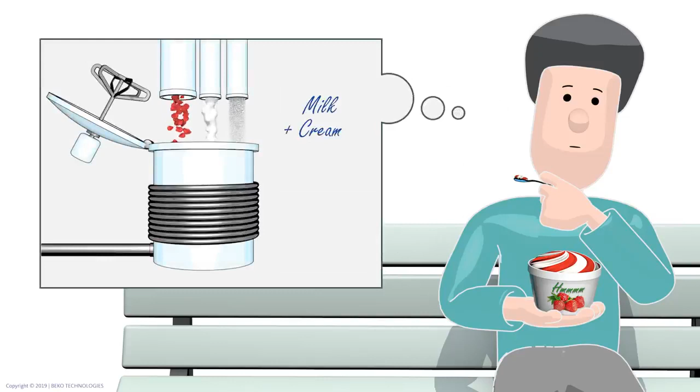That is Peter. And on this sunny day, he, like many others, has an appetite for a big ice cream. There he is already. Which ingredients are needed to produce ice cream? And how is it even made? Why compressed air? Peter asks himself. He hasn't thought about it yet.

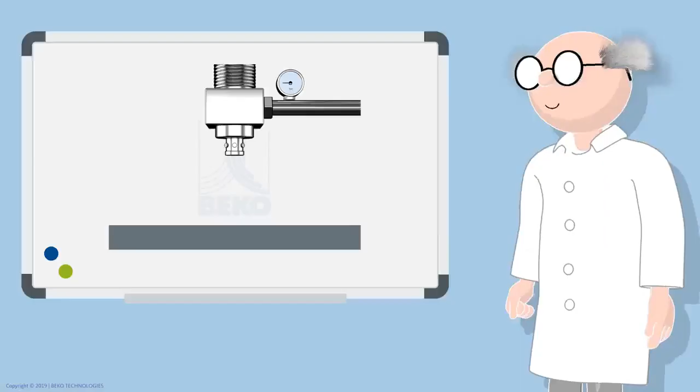Compressed air is used because the air pockets increase the volume of the ice cream and make it creamier. This is quite a great invention. But isn't normal air filthy, and contaminates the ice cream with unwanted, or even hazardous substances? No need to worry, dear Peter.

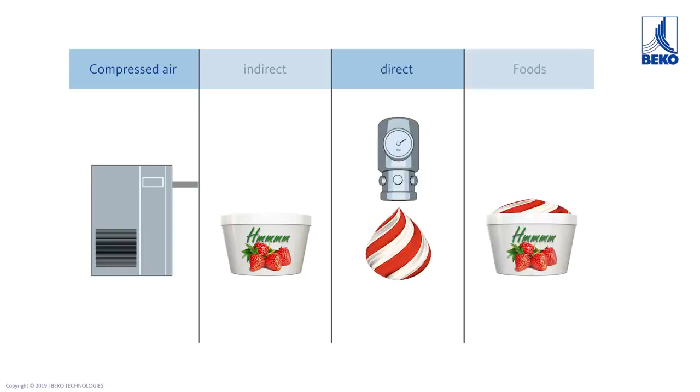Compressed air is needed in almost every production process. Compressed air comes into indirect or direct contact with the food. Anyway, a high degree of care is required for this process. In indirect contact, for example, the cleaned yogurt jar is dried with compressed air.

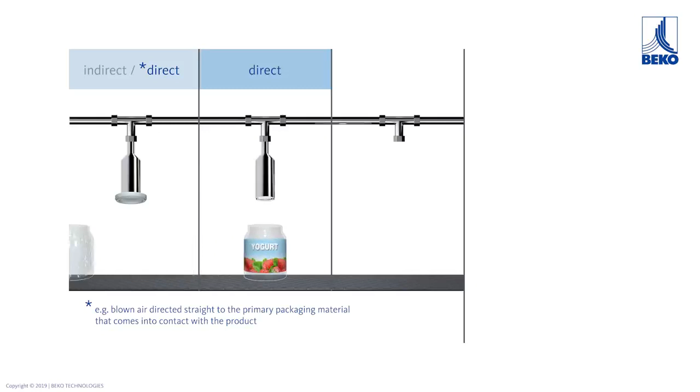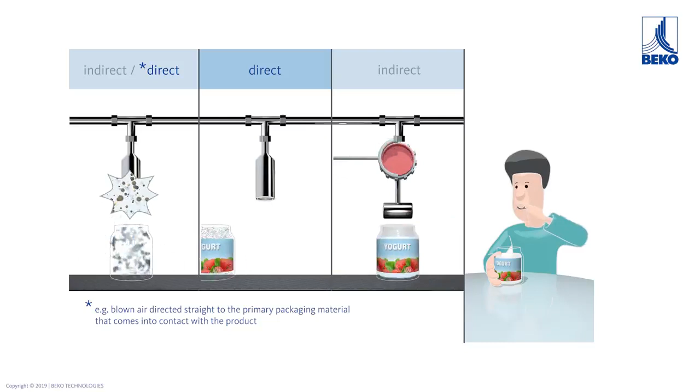Direct contact occurs when the product is filled with compressed air. Finally, the closure of the jar is transported with compressed air, and closed. Contamination by microorganisms, oils, or particles can contaminate the end product in both indirect and direct contact, and cause an enormous loss of quality.

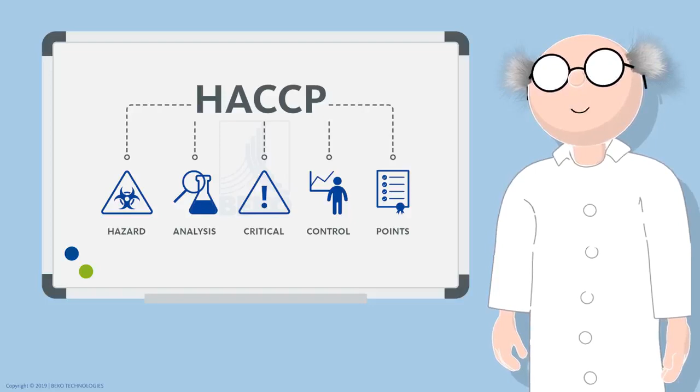There are different and effective approaches to ensure food safety. For example, the HACCP, a management system for hazard analysis and definition of critical control points, as well as additional processes to measure, control and minimize risks, like the Operational Prerequisite Program, OPRP.

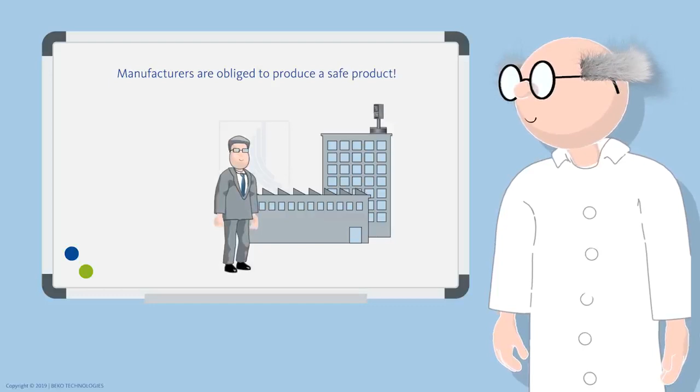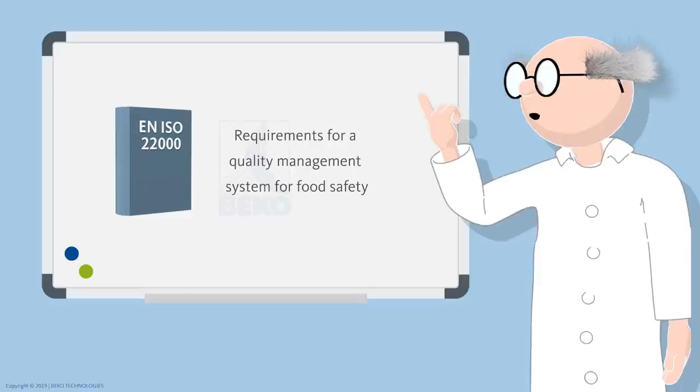Manufacturers are obliged to produce a safe product. The producers themselves are responsible for determining and monitoring their compressed air quality. This is expressly stated in the standard EN ISO 22000. The requirements for a management system for food safety are defined here. The standard applies to all organizations in the food chain, regardless of their size and complexity.

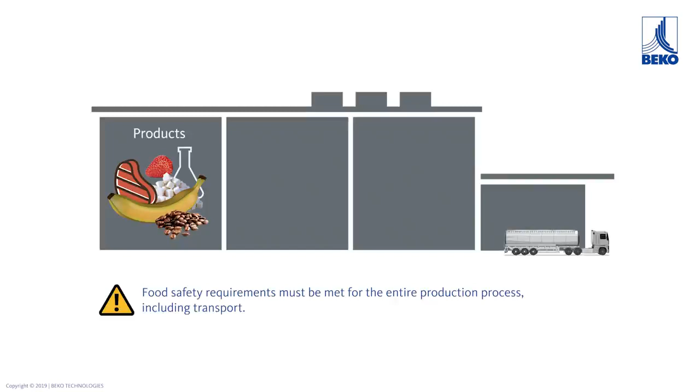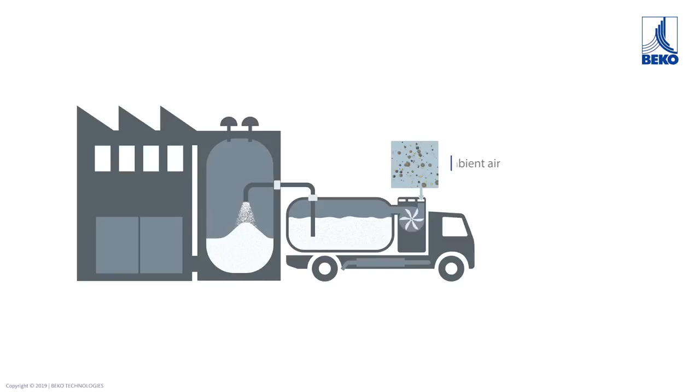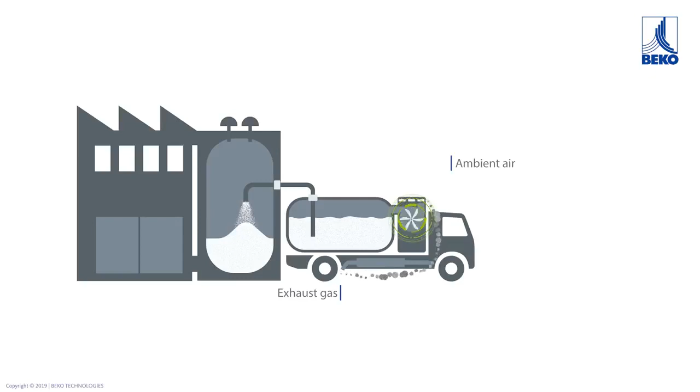The requirements for the safe manufacturing process do not only apply to our own production, but also to that of each supplier. For the entire production process, including transport, food safety requirements must be met. The example with the truck shows that even a clean product can still be contaminated in the last few meters. Via the truck's compressor, unfiltered ambient air would be sucked in and used for the unloading process. A suitable compressed air treatment system must always be used for safe loading and unloading.

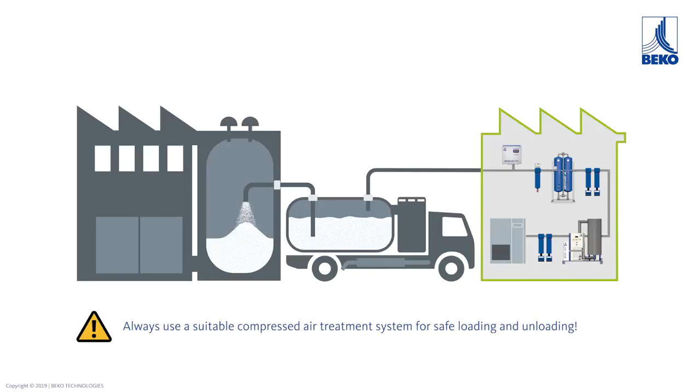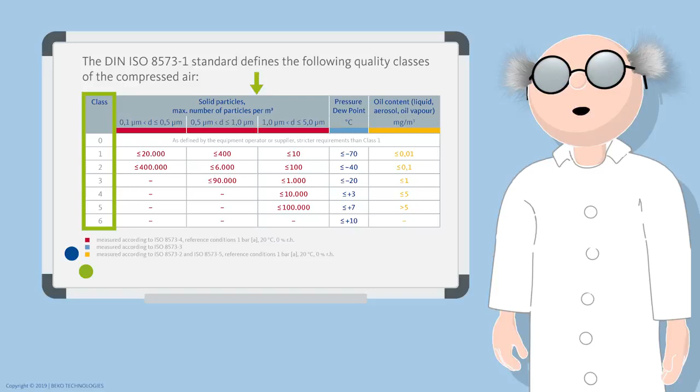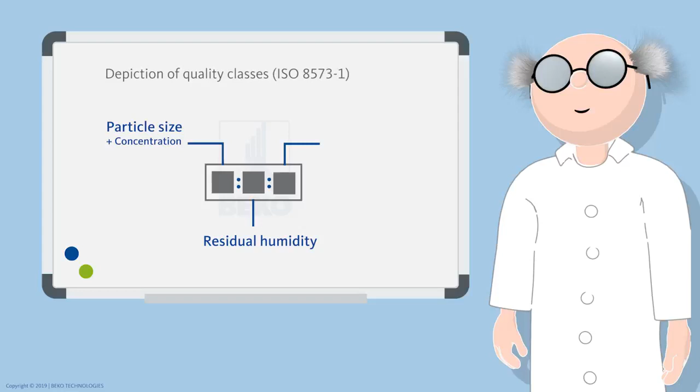The standard ISO 8573, for example, stands for the quality requirements for compressed air, and specifies the maximum content of solid particles, air humidity, and residual oil, or oil vapor, that may be contained in the respective classes. The quality classes for compressed air are indicated by 3 digits. The first digit stands for the particle size, the second for the residual humidity, and the third digit for the oil, or oil vapor content of the compressed air.

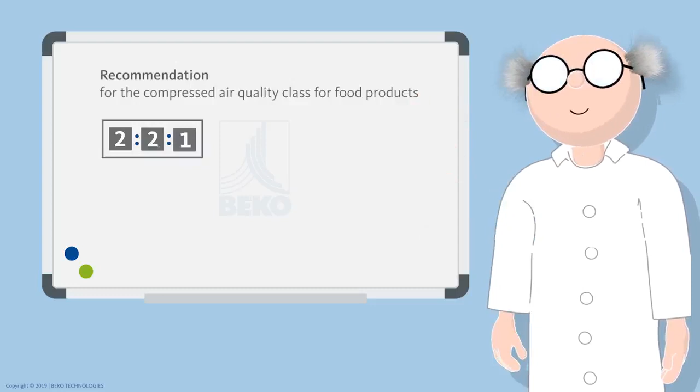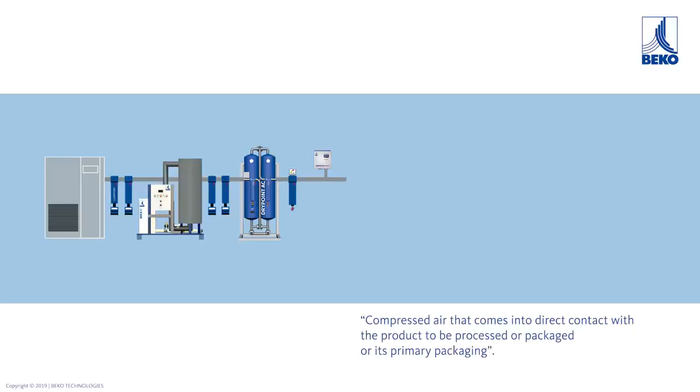Depending on the required quality class, an appropriate treatment of the compressed air is necessary. This applies to the food industry. There may be no entries into the food from sources of danger by compressed air. In case of direct contact between product and compressed air, the quality class 2:2:1 is recommended. In the case of an indirect contact, the recommendation for the compressed air quality is class 2:4:2.

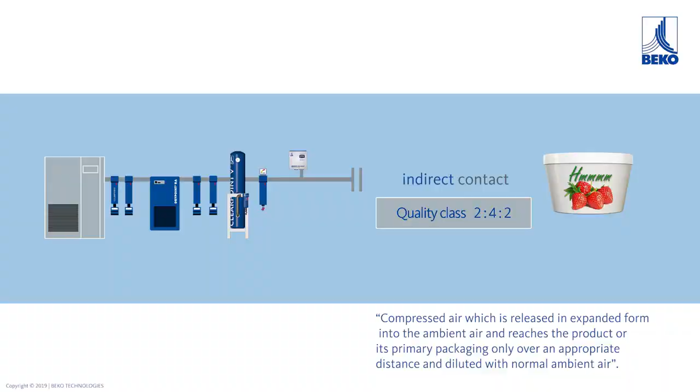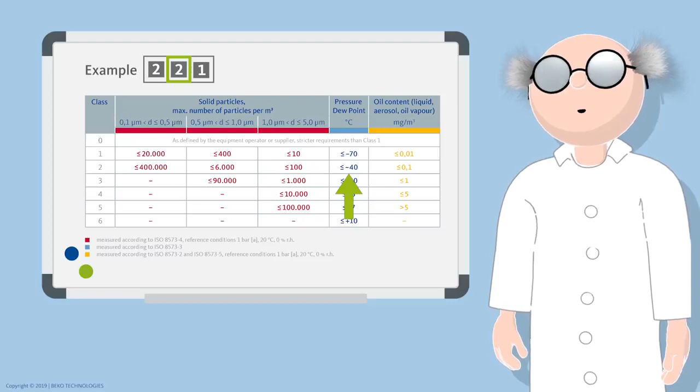As a reminder, please refer to the table again. With a compressed air quality of 2:2:1, there may be less than 100 particles, with the size of 1 to 5 micrometers, in 1 cubic meter of compressed air. The residual oil content, in this cubic meter, is limited to a maximum of 0.01 milligrams. If one now considers the middle figure for the residual moisture, a pressure dew point of -40 degrees Celsius is required. Special dryers, such as adsorption dryers, must be used for this very dry compressed air.

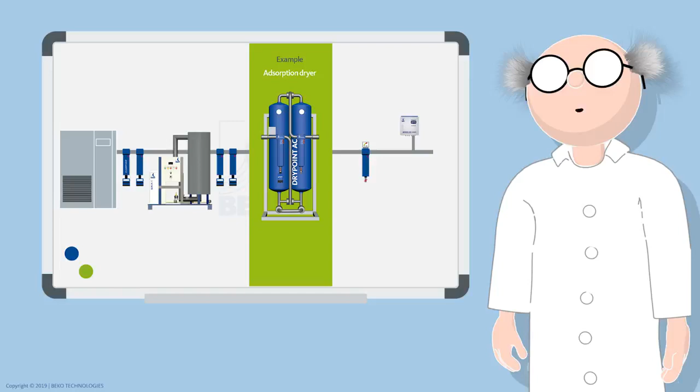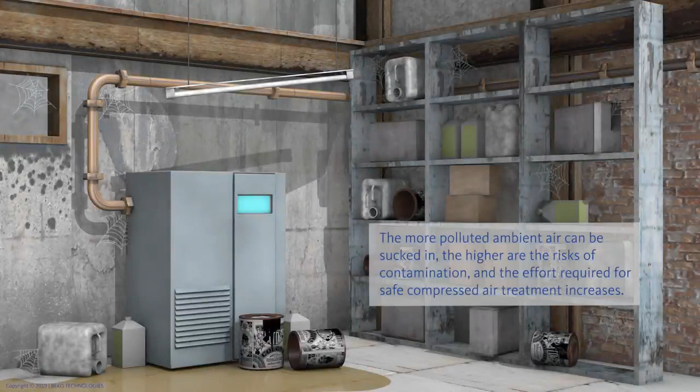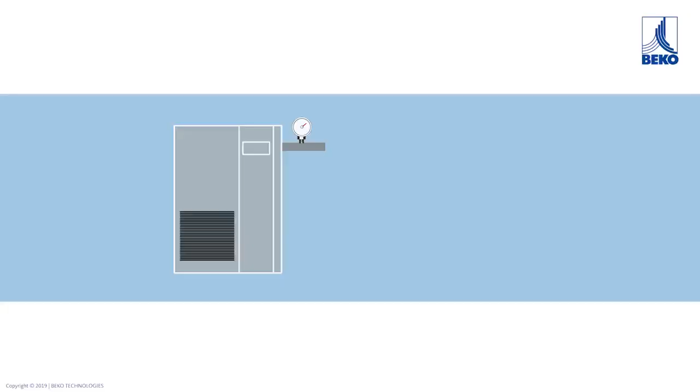The location of the compressor has a great impact on the quality of the compressed air. The more polluted ambient air can be sucked in, the higher is the risk of contamination, as well as the effort required for the safe treatment of the compressed air. It should also be noted that the ambient conditions, such as day and night, can change considerably.

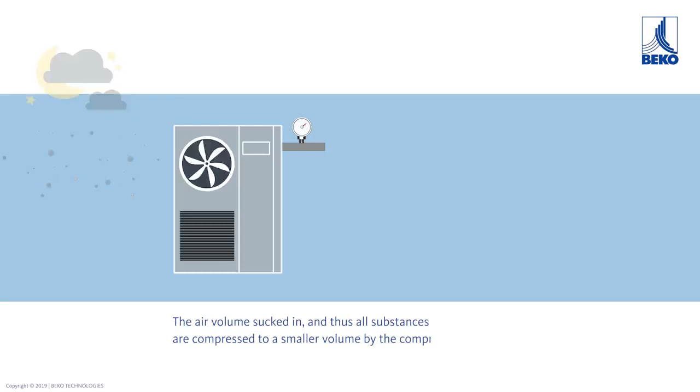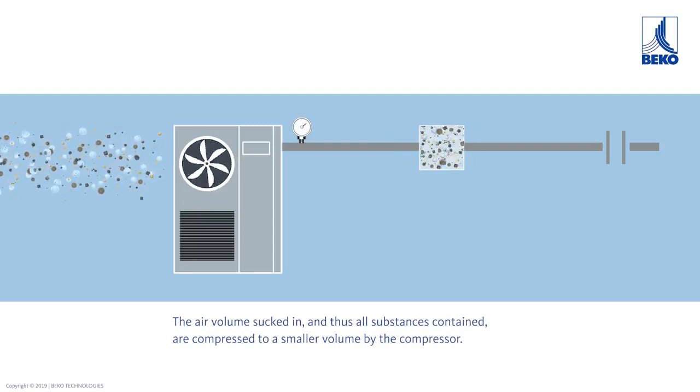The air volume sucked in, and thus all substances contained, are compressed to a smaller volume by the compressor. For example, with a compression of 10 cubic meters of ambient air, with a system pressure of 7 bar, after compression all components of the sucked-in air are contained in approximately 1.4 cubic meters of compressed air.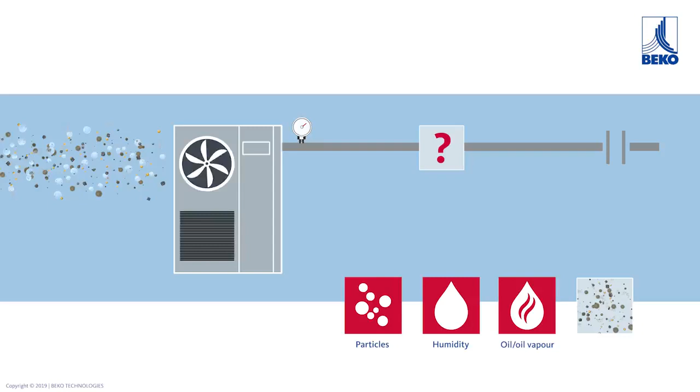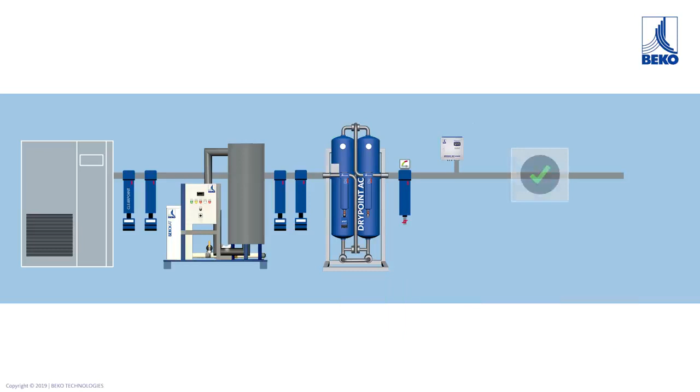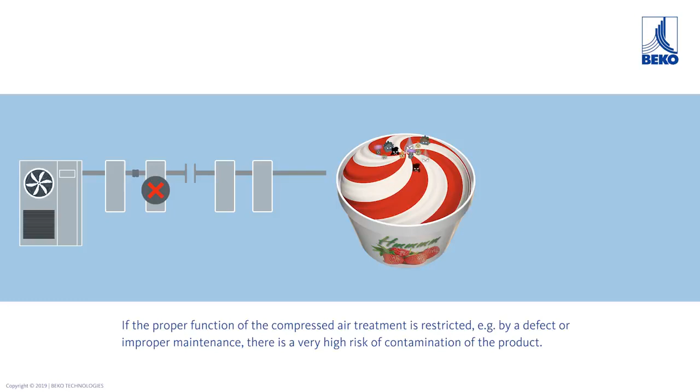It must therefore be expected that after the compressor, a mixture of particles, humidity, oil vapor, and germs is contained in the compressed air. However, these substances can be removed, or their quantity reduced to a harmless minimum value, by optimal compressed air treatment. It becomes problematic if the proper function of the compressed air preparation is restricted by a defect or improper maintenance. Here there is a very high risk of contamination of the product. The influencing variables are the time of malfunction, temperature, pressure, and humidity.

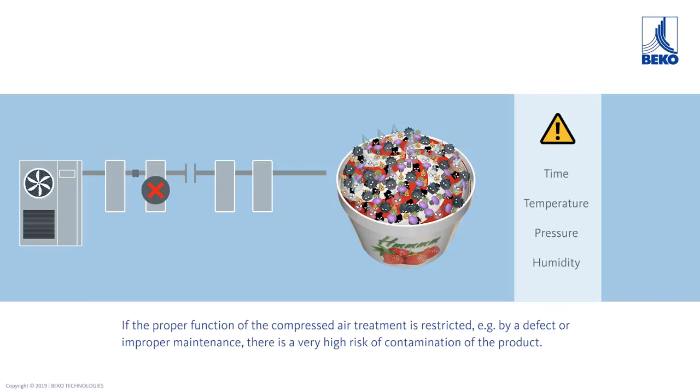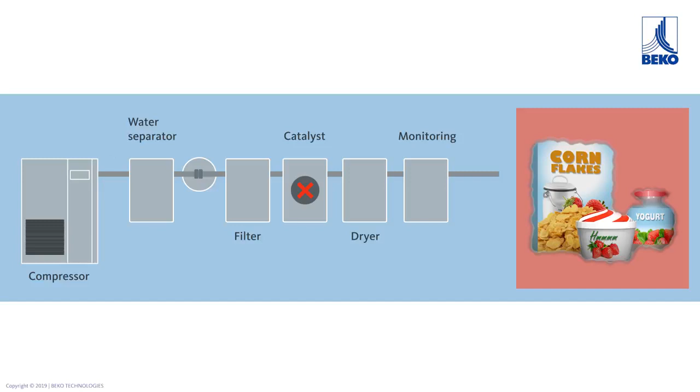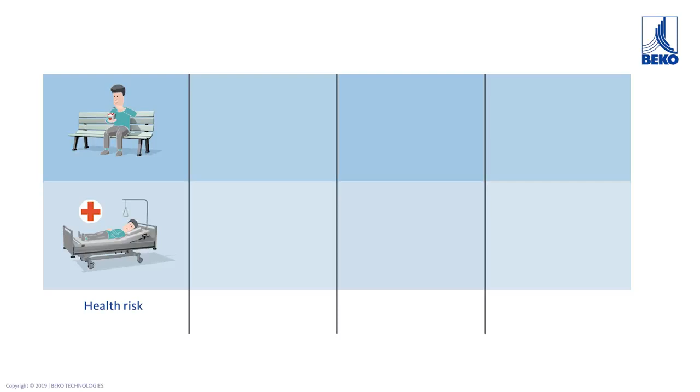Even minor defects in the compressed air treatment, for example due to malfunctions or improper maintenance, can have a considerable impact on product quality. In order to exclude risks from the outset, a perfect compressed air and adherence to the required quality class are required. Contaminated foods could pose a health risk for the consumer. In addition, sellers and manufacturers may incur considerable costs and legal consequences.

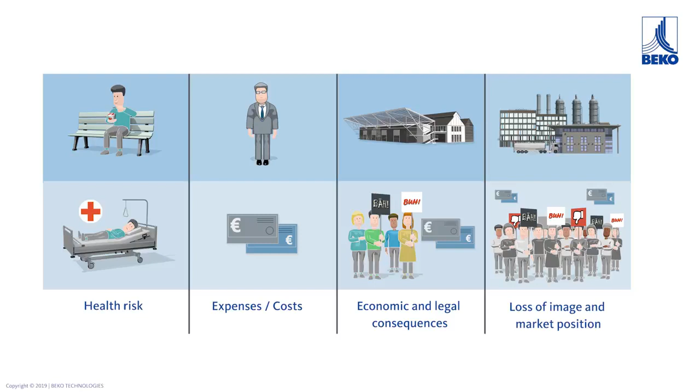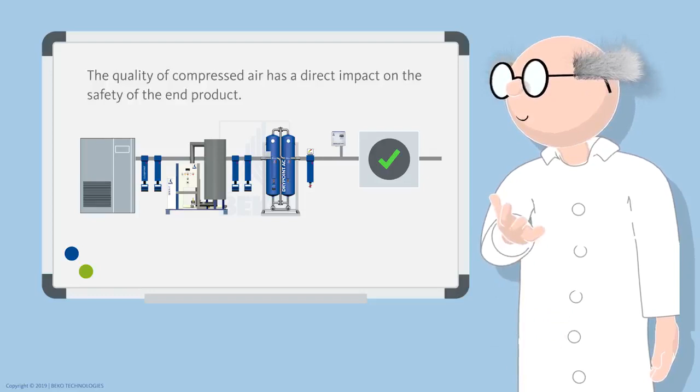Depending on the contamination, and the quick reaction of the industry to detect and avoid it, the loss of image and negative consequences for a large part of the food industry can be expected. To sum up, the quality of compressed air has a direct impact on the safety of the end product. Therefore, it is essential for a safe process to measure, check, and record the compressed air quality completely.

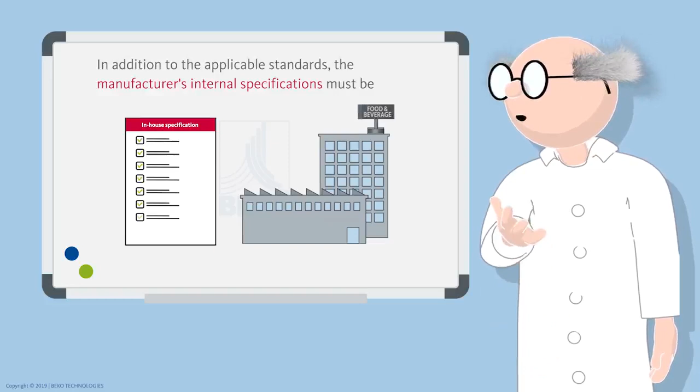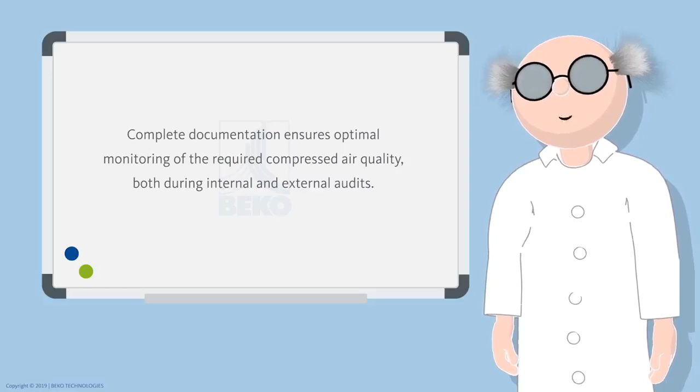In addition to the applicable standards and guidelines, this evaluation is based on the manufacturer's in-house specifications. Complete documentation guarantees optimum monitoring of the required compressed air quality, even during internal and external audits. The complex processes and connections require a technical understanding of the production medium, compressed air.